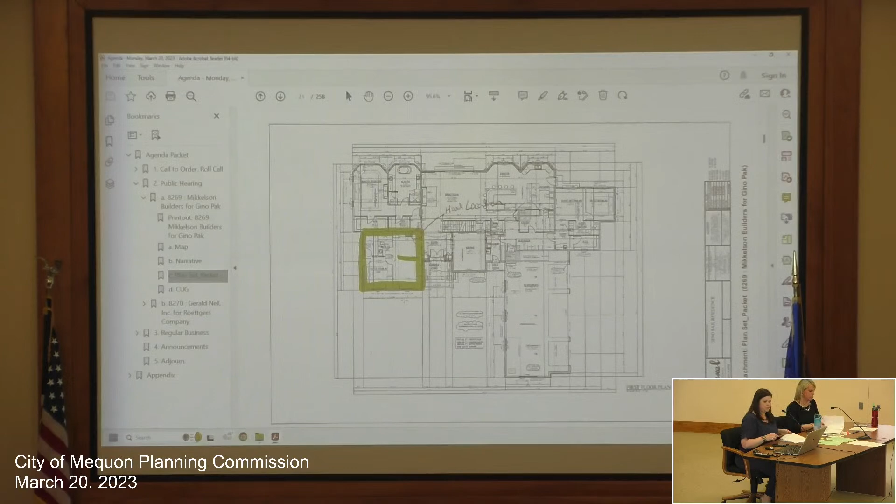Thank you, take it back to the commission. Any questions, comments? Alderman Strelchuk: this looked really pretty straightforward and well planned out. I'm going to make a motion for approval.

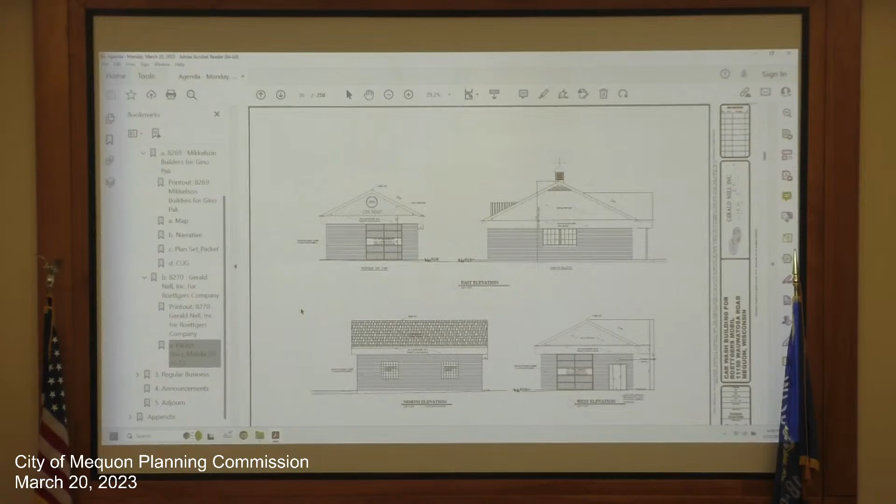For the site plan, let me grab that for you - and I apologize, that is a little small, let me see if I can blow that up. There we go. As you can see, the car wash is proposed to be on the south side of the convenience store. It's approximately 20 feet from the property line and does meet all setback and offset requirements.

The queuing of the car wash is along the west property line. This allows the queuing lane to be somewhat hidden from Mequon Road and Wauwatosa Road, and since many car washes have issues with excessive queuing, hopefully this back property line will allow for more queuing.

Staff has concerns about this queue lane and drive lane behind the store. As you can see, the outline here is where they intend to stripe the queue lane, but it gives the appearance that there's a second lane, and it's not wide enough to get a car through. So if you have a couple cars in this area, any car trying to travel behind here would get stuck until that queue line cleared up, and then they could come through.

Staff also requested a turning analysis, and it showed that to be able to get around this building, you have to enter into that queue lane. So staff is recommending that they redo their striping to indicate that yes, there is only one lane and not a second lane.

On top of that, we'd like to request signage stating that this is for car wash patrons only, so nobody gets stuck in this area. Staff is also a little concerned about this area here behind the car wash.

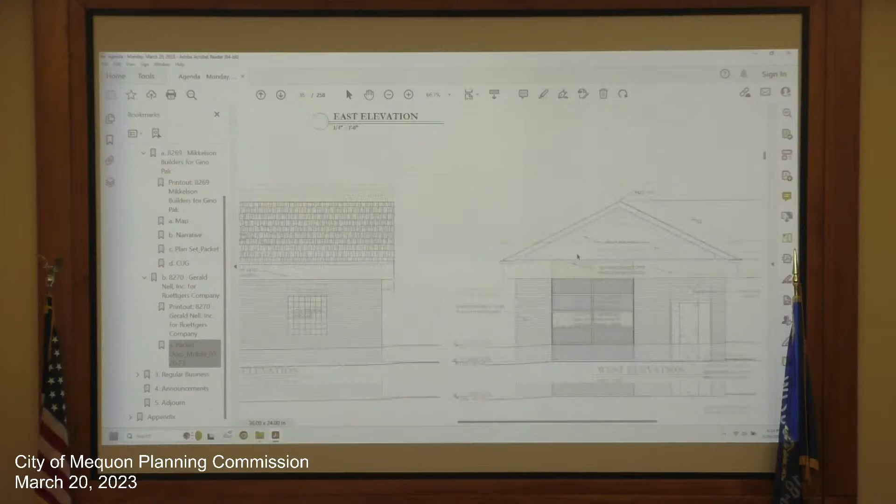On to landscaping - let me just grab that for you. This is the proposed landscaping plan. The plan shows that the majority of the landscaping will remain as is on the site, except a few trees, some arborvitae, and a few shrubs around the periphery dispersed throughout the site.

The plan does not meet code for street trees, parking lot shading, the 30% open space requirement, and parking lot landscaping. While it's difficult to meet that 30% open space requirement given the existing structures and site plan, the applicant hasn't really made any effort to address the spirit and intent of that requirement, so staff is requesting them to improve their landscaping plan to meet it.

Staff also has concerns about the lack of planned investment in the landscaping and the reliance on neighboring properties to provide screening and shading. The majority of the plantings planned to be kept are overgrown, in poor condition, or dead, as seen in the attached exhibit in your staff report. The existing landscaping doesn't reflect the quality of landscaping installed in other properties surrounding the corridor.

For instance, we included the Wisconsin Vet Clinic's landscaping plan, which is directly to the west, just so you can see the difference in investment and attractiveness of their landscaping compared to what's going on at Mobile.

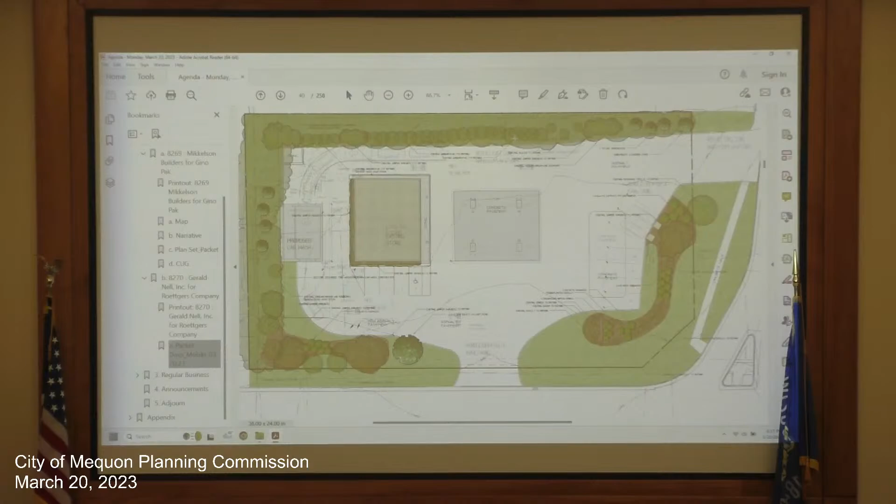In summary, staff provided a table outlining all the deficiencies in the code, areas of concern, and unknown details. Staff does recommend tabling the decision to allow the applicant additional time to meet these requirements, which would make them eligible for approval and address the issues identified in the table.

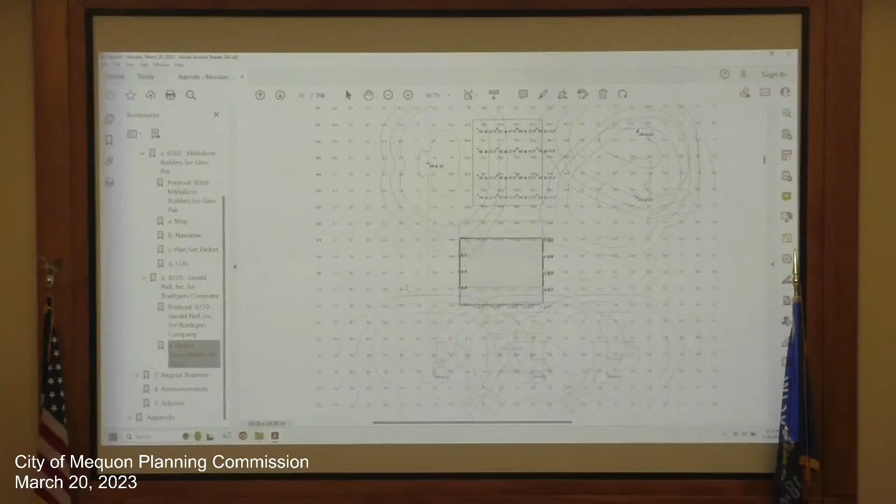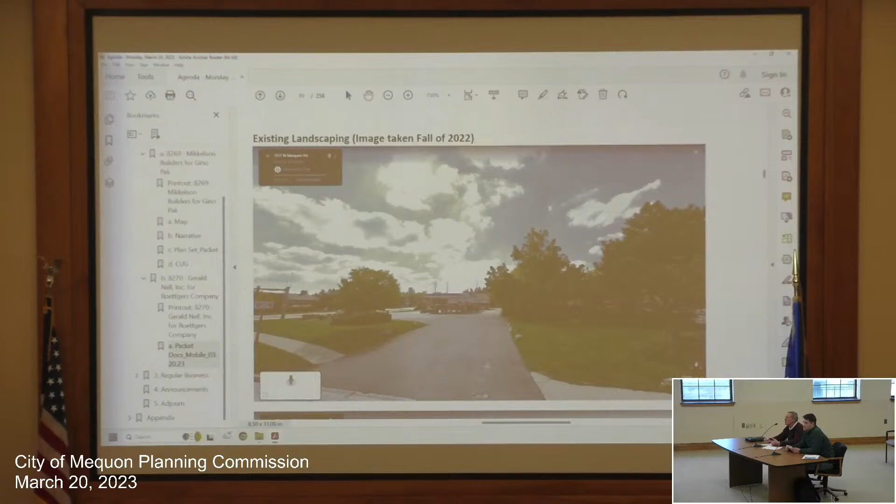I guess if we could zoom in, I just want to understand for myself. I mean, those are all landscape trimmed bushes. If you scroll down again, you can see that. Right now it's the middle of winter, and I understand that, and we've had a different type of snowfall this year, so I understand we have to clean up things from a landscaping perspective. However, I'm not sure exactly what's required beyond maintaining the property, adding and cleaning up. I get that, but to say that it's not been taken care of, I just don't understand that.

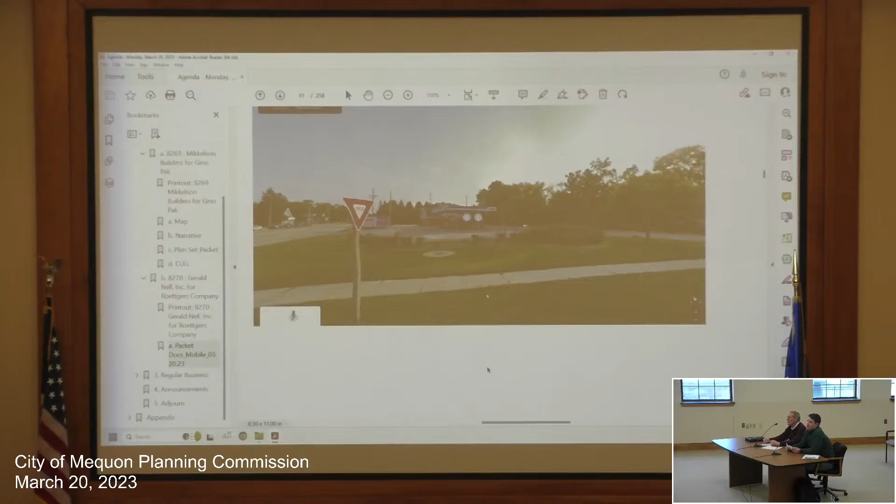Sure. Okay, all right, perfect.

Well said. It's one of the gateways to our city, so appreciate staff making sure that it lives up to that standard. Why don't we bring it up to Planning Commission for any feedback and questions?

Commissioner Chorin: As I listened to your report, in the past when you bring up some things, we can get the applicant to react to it, and they're fairly minor, things that can be documented. But as you proceeded, you started to get to a point where I think it would be hard to record them without some sort of drawing or something. So that's problematic to me. I think I agree with the position of the staff.

Alderman Strelchak: So I've got a couple questions. You were counting a couple of the parking spots as pump locations? That's correct. Our code for gas stations, the gas canopy, any gas pump parking spaces actually count towards that total.

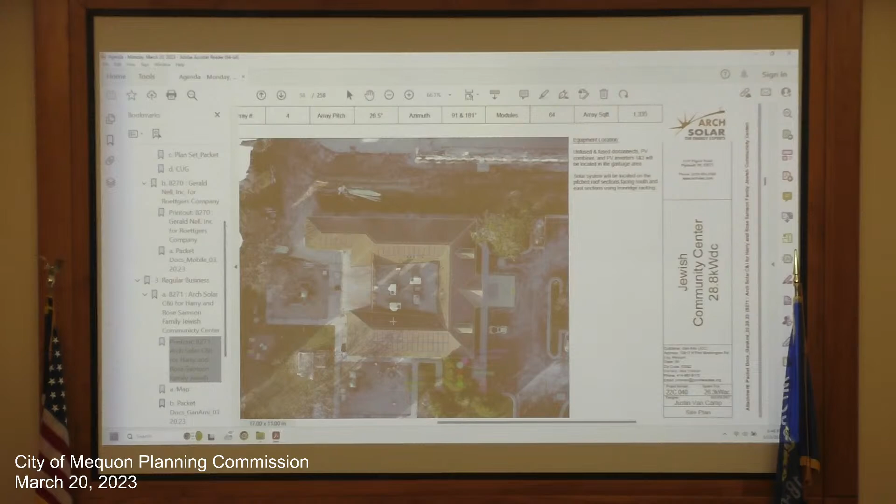The plan proposes the installation of 64 solar panels covering approximately 1,300 square feet. Let me get this on the screen so you can see exactly what we're talking about. As you can see, we've got solar panels facing the east elevation and then down towards the south elevation. 16 panels will be on the east, and the remainder on the south. The south solar panels will not be visible from Port Washington Road, primarily due to the significant tree coverage on the Cedarhurst Senior Living Community property just to the south. The solar panels on the east-facing roof line will be visible from Port Washington Road, though.

Staff did identify a couple compliance issues with this site that we were hoping to have addressed. Let me grab that map for you. Staff identified a portion of the parking lot has been placed approximately 20 feet over the property line and does not meet the 20-foot setback requirement. Staff can't identify when this was put in, and it was definitely not approved through Plan Commission. Therefore, staff recommends as a condition of approval that this portion of the parking lot be removed, landscaping be restored, and curbing be installed to make a continuous curb line along the drive lane by June 1st of 2024. So we are requesting this in about a year and a half, hopefully giving them ample time to correct the situation.

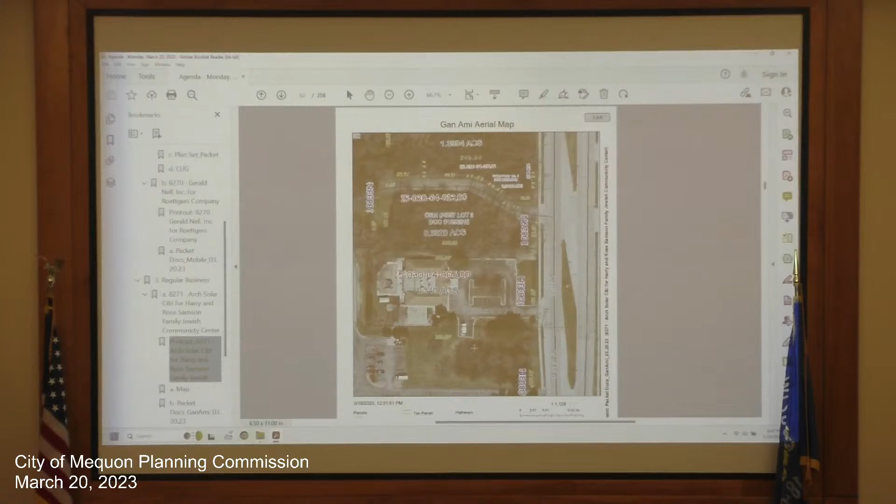In addition, staff has noted that the site does not meet Section 58-5064 of the landscaping requirements, including street trees, parking lot shading, and landscaping between the public road and parking lot. In staff's opinion, at a minimum, street trees and landscaping to screen the parking lot from public view should be installed by November 1st of 2023. This is also to help reflect the fact that the city is going through a streetscape program right now for Port Washington Road, and this will also enhance that corridor's appearance. In conclusion, staff recommends approval of the building plan based on the conditions provided. Thank you.

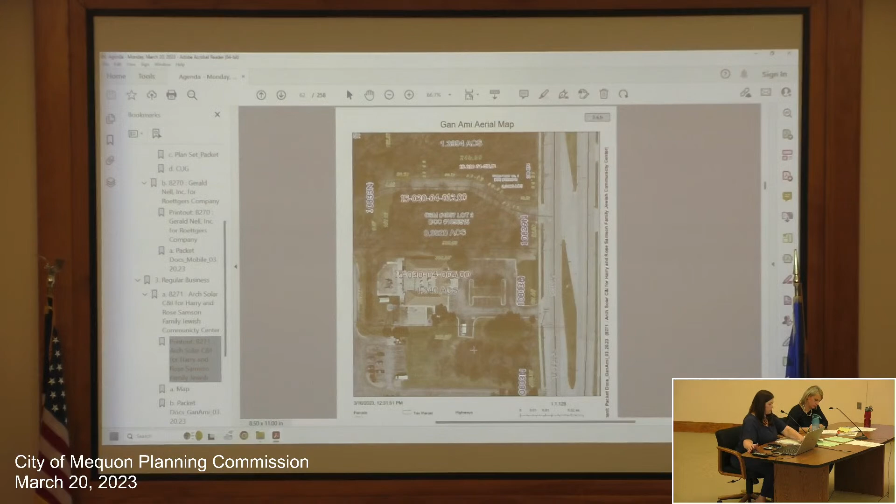Thank you. Is the applicant here? Do you have anything you would like to add? No, name and address pretty much sums it up. Okay, thanks for letting us apply for these. I think it'll be a cool project.

Yeah, we thought so. On the 20-foot parking item, I think staff was very reasonable, giving you until 2024 to figure out a solution for that. So, I work for the solar installer.

So I guess for them to install the panels, would the solar installer be responsible for that work? No, but the applicant should be aware of it. Oh, okay. We're about to vote on this. Do you think they're okay? Okay.

Any questions from the commission? Commissioner Chorin? Move to approve based on the comments from the city staff. Second. We have a motion and a second. Any further discussion?

All in favor, please say aye. Aye. Aye. Any opposed? None. Thank you, have a good evening. Thanks.

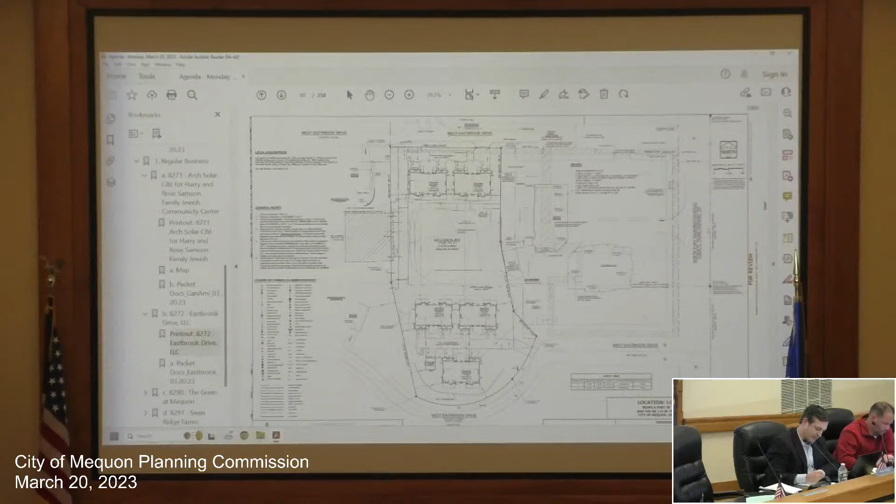Thank you, Chairman. This was in front of us last November for a PUD amendment. This is phase 3 of Lexington Square. The plan on the screen is the site plan that pretty much mirrors the concept plan. There's 2 buildings located on the north end and then 3 on the south end, with a driveway coming in through here and a driveway through here. Again, they meet all the requirements of the R6, the PUD, and the PUD amendment.

Throughout this process, there's been, I think, maybe too much conversation about building design. I did have some comments originally at the last planning commission. I met with the architect, Marty Chorn, and the applicant, and the common council weighed in on the architecture as well. So we ended up having a number of different iterations to the plan. I'll go through where we ended up, and we're looking for feedback from the commission.

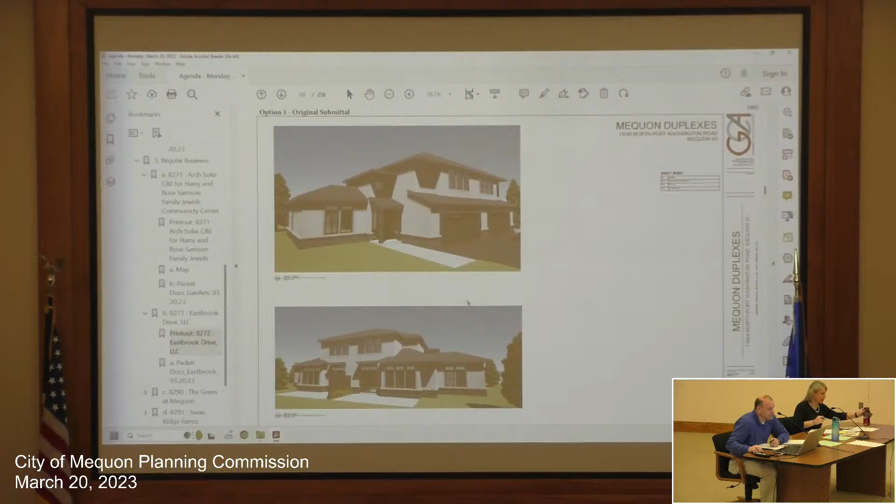So this was the original concept plan. It showed basically the front having like a shed roof, a stucco-type material with some more earth tone colors. I think at the time staff was a little concerned about the materials as well as the shed roof design. The applicant did come back with another design that had a little bit different roof line, a different material, a different entranceway. And then there was a discussion at one point about having the garages separated. We were concerned about having the garages next to one another.

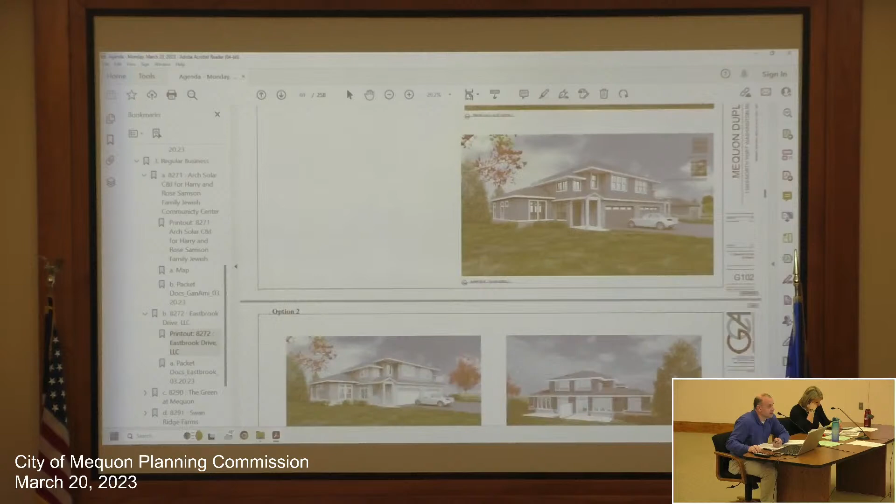So then they came up with a third design, which is basically the current design. Let me zoom in a little bit, which is the top version. What we tried to do here is emulate some of the developments in the neighborhood. But the hard part is this building width isn't quite as wide as some of the other ones, like Aster Woods and Eastbrook Court, which are roughly 90 to 100 feet in width. This one is only about 70. So it was difficult to totally emulate what we were looking at in the neighborhood.

So staff was concerned and maybe felt option 2 might have been a better option than this current one. I took some pictures of what's out there now. This is Eastbrook—as you can see, they have the roofs, the garages separated, a big gable roof on each end, but a lot more substance in the middle in terms of the building and the roof line.

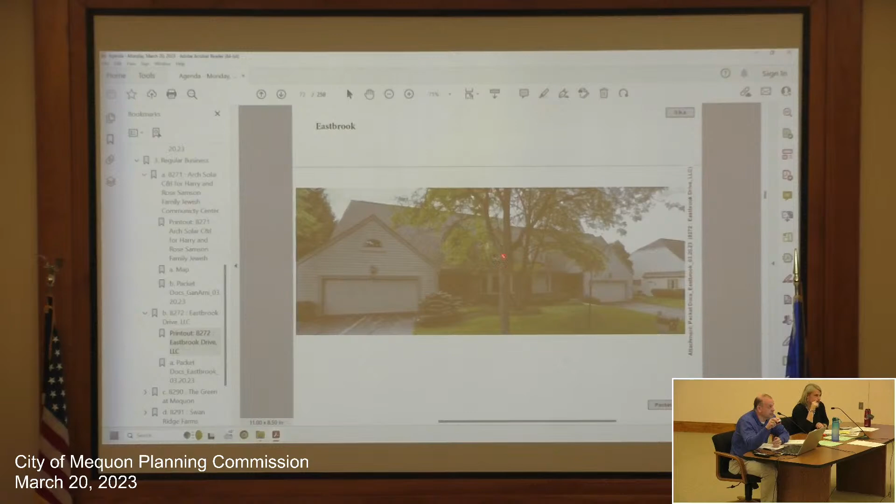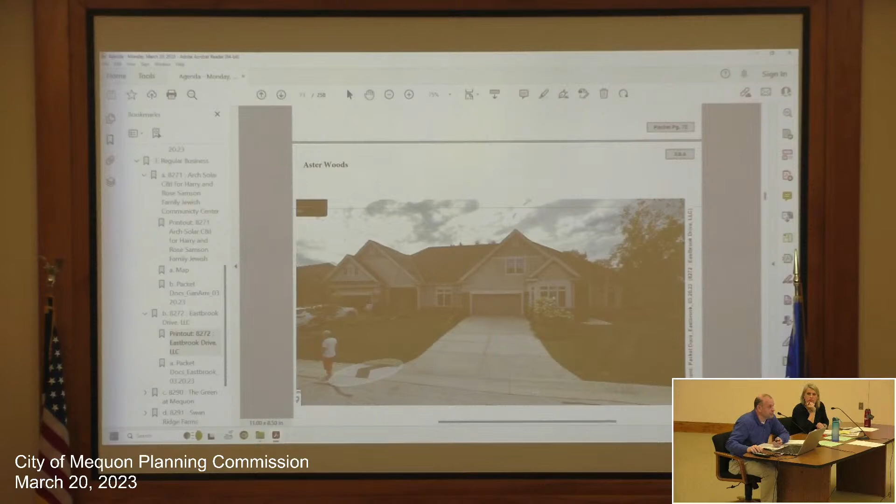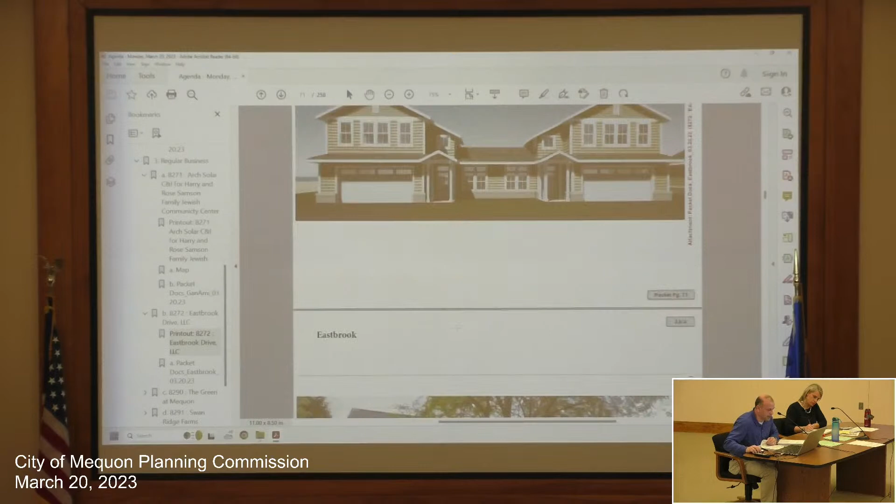And then this is Aster Woods, kind of a similar design, but again, this is a lot larger building footprint than what's being proposed here. So we're looking for some feedback and direction from the commission on what design to go with. Eventually this actually gets approved by the Architectural Review Board—the Planning Commission's role is to pick a concept design, and the Architectural Review Board will decide on final design, materials, locations, and things like that. I think there was something asked about a neighbor who sent an email regarding landscaping.

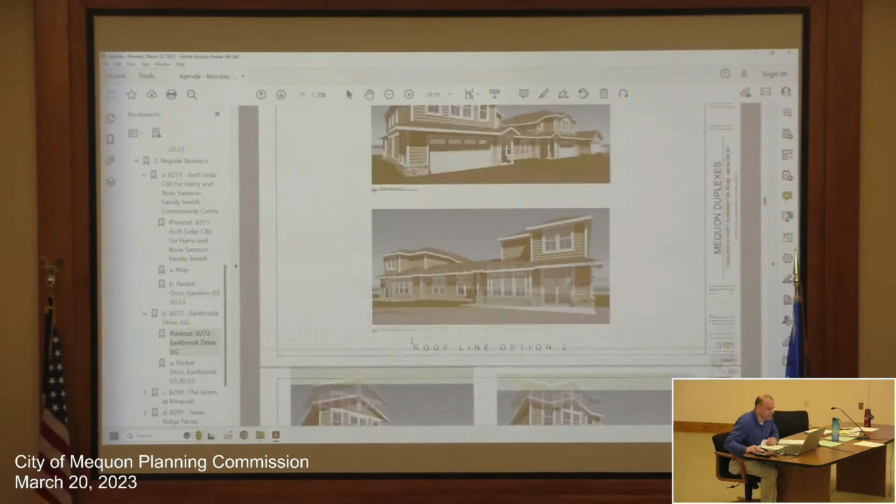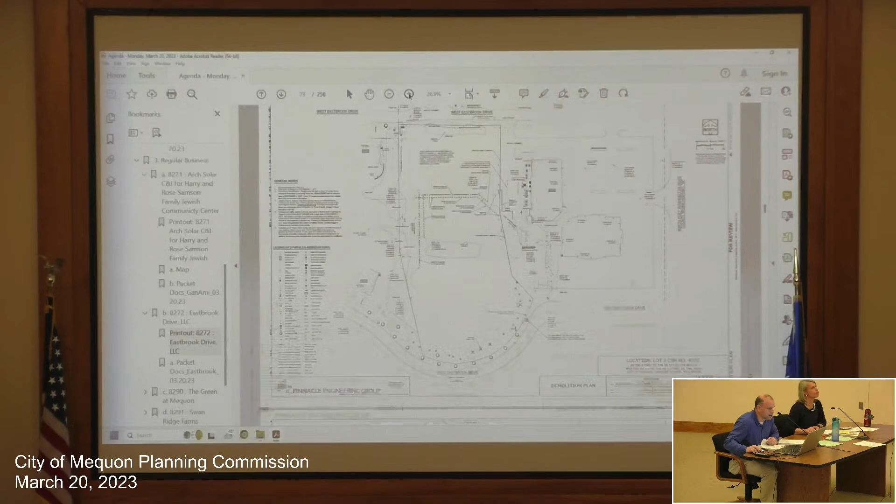Basically, the concern was over the landscaping along Eastbrook Drive. It didn't state either side, but I believe it's probably both where the concern comes in. On the north side of Eastbrook Drive, you see this area here where it says remove trees. This is an area that has a number of different existing pine trees and some deciduous trees in there.

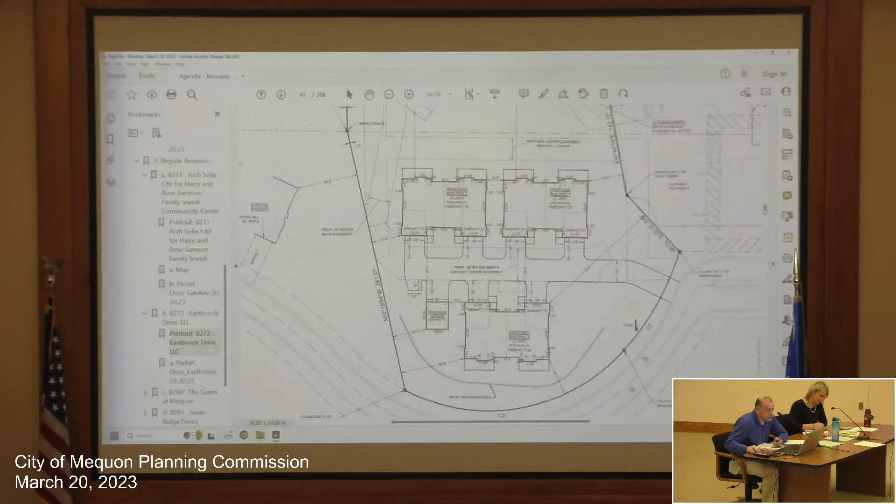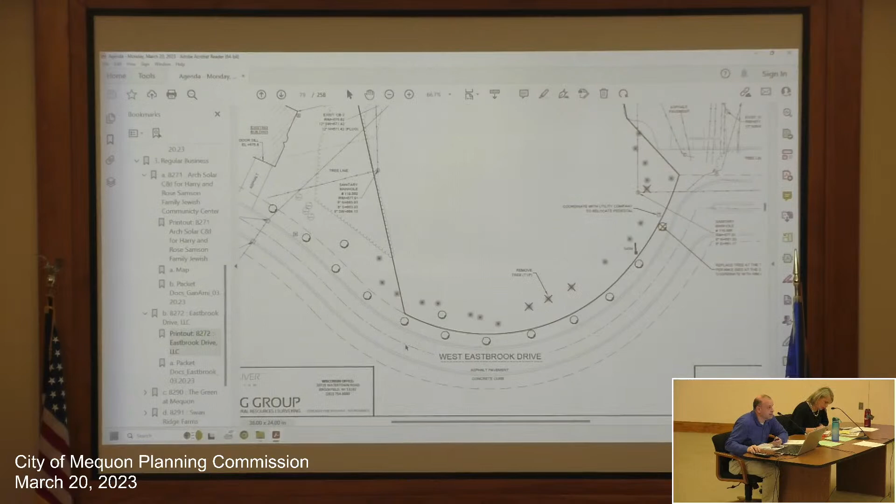So here they're showing not too many - there's a couple of trees being removed, you see three here, one here. These are some evergreen trees being removed for the development. They're replacing some of the on-site landscaping back in the yards of these buildings, but they're not replacing these trees. There are also a couple, at least from what I could tell when the snow was here, dead street trees that were actually removed and not replaced. So if those are still in that condition, we would like to see two new trees there as well.

Other than that, overall, we're supportive of the plan and recommend approval according to the conditions in the report.

Thank you, Mr. Zader. I don't believe anyone had anything to say about this matter, no one's registered to speak. I did have several of the homeowners reach out to me over the course of this process and ask questions, and they all seem very supportive of the project. They understand it's going to be built on. Seems like the screening along the main road there is the main concern.

Jackie, you said the main reason why it has to come down is because there's a sanitary sewer line underneath it - but why does that mean the trees have to come down? Well, in order to put the sewer in, they're going to have to dig it up, which will impact it. But there's also a driveway.

I have the proposed plan up in front of you, and I can show you both. The driveway itself is also an issue, as you can see - it's coming through here, and then I believe that hatched area is the sanitary sewer easement. So there's a sanitary sewer easement here in the hatched area, and then the driveway here. Those two things combined make it difficult to keep those existing trees. Now, as you can see, there's white area outside that sanitary sewer easement - this is part of the public right of way. This is where I'm proposing that we add street trees every 30 feet on center, which would match what happens down as we go west towards Eastbrook.

Got it. This time we're going to take it to the applicant for a brief presentation, and then we'll discuss it up here.

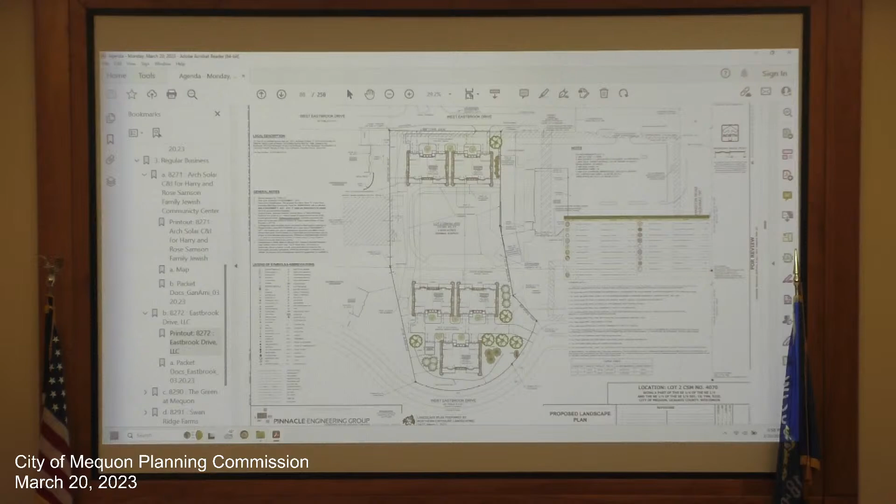So again, we're just looking for feedback, and then once we have a concept plan decided upon, that recommendation will go to the architectural review board, and they can work on the details of the locations of the materials, the brick, the stone, and things like that. Thank you. Any other comments or issues with the recommendations by staff in the packet? No.

Good evening, Tony Zanin from Pinnacle Engineering, civil engineer on the project. There's two comments about access points. One on the north, we understand, keep it as far easterly. That's been kind of the theme going back to the approved plan in 2019.

The one on the southern end, we did some changes back in '19. We originally had it due east-west, so when you came in, the engineering staff at that time felt like if you came in and you were heading due west, you would drive right into the site, and they didn't like that idea. So we put that curve in it, and we're kind of south of the median.

So if you leave our site, you would kind of direct yourself to the south side of the median to drive easterly. I think when we were here a few months ago, there was some conversation about shifting it 50 feet further east from what you see on the screen. Today's condition is 30 feet further south. So you'll see, if I don't have a pointer as Jack did, but yeah, you see that curve there. We would twist it even further southerly, 30 feet.

There's also a sign on our property that's actually not our sign, it's the neighbor's sign. So if we shift the road, we're going to really get into that sign, and our vision triangle on that driveway is going to be more impeded. So that's going to make that sign a bigger issue.

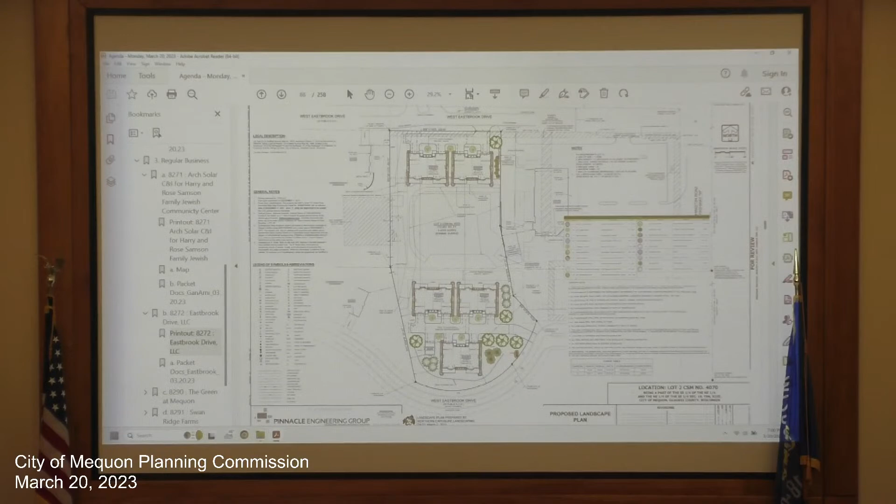We can talk about it. I don't know if this is a place to talk more about it, or if we could just, if you're going to do the approval. Well, item 13 of the conditions of approval says the south access point shall be moved south of the existing Eastbrook Drive median, approximately 30 feet south of where it is currently shown on the submitted plan. So that sounds somewhat definitive.

Cole: I was gonna say, can you guys hear me? I was gonna say I'd be fine with striking that condition and just working with the applicants. We don't want it getting into that sign either, especially with vision coming out. So I'd be fine with just removing that condition of approval if you guys are okay with that.

How would you want it stated? You can just remove it completely, or you can say move it. Want them to work with you or not work with you? Because if you remove it, they don't have to work with you on it. Right, we could just do—applicant must move.

Let's work with staff on the final driveway location on the south end, to be determined with staff. Any other matters we should discuss?

Turn it over to the Planning Commission, Commissioner Chorin, and thank you for meeting with staff and the applicant for this process. The plan illustrates having the driveways separated, the garages separated. We spent time looking back and forth at the different options relative to where the driveways are, where the garage doors were, where the entrance was. What struck me looking at the pictures of the existing Eastbrook Estates homes is that clearly the garages are separated, so if you want to be somewhat sympathetic to that, I think that's the right approach.

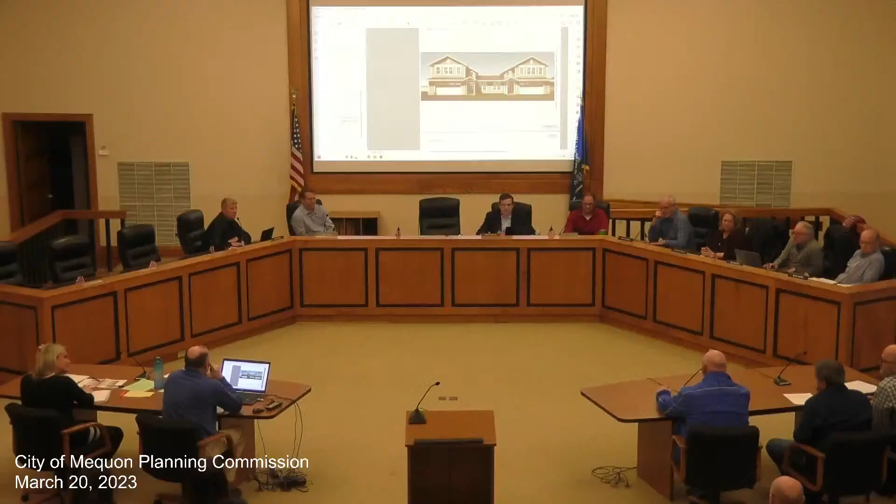There was, I don't know if I have this, I'd have to go to the actual packet. There were some side elevations that you can kind of see here. This section had a bump out with stone, and when Marty and I met with them, we had them remove that. We didn't feel that was necessary. It was kind of heavy, sticking out.

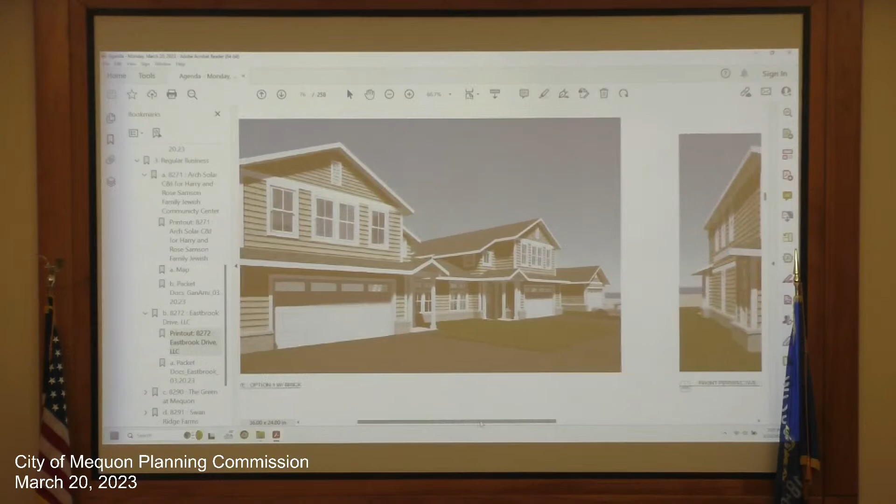No, it worked good. It's just they suggested that we remove some of the stone. That's kind of... we need some more dialogue here.

Commissioner Holly. I actually prefer option 2, honestly, not to be like the lone wolf, but I do kind of agree with John. I mean, it's your building.

Do you prefer option 3? We prefer option 3 for the interior layout. So you do, okay, getting an extra den out of there, so there's a little more space. Yeah. Okay, I do agree with John's comments though.

Honestly, visually and aesthetically, I still like 1 and 2 better than 3, but where do you guys stand? Sure, so we get an extra room out of option 3.

Yeah, I mean, I would defer to you. You're the developer on this. If that's what you want to do, I'm perfectly fine with that. And I would say that the architectural board is probably going to give you some comments as to what they're going to want to see, but I'm fine with that.

I just want to clarify that only these 2 buildings will actually face the road. These will all be faced interior, so we're really kind of talking about the facade of those 2.

Okay, good feedback. Other commissioners.

I'll just thank you, Commissioner Lemke. I'm going to defer to the architect. I've got an opinion, but 6 opinions here is not going to clear anything up, so I will defer to what Marty wants to say on this.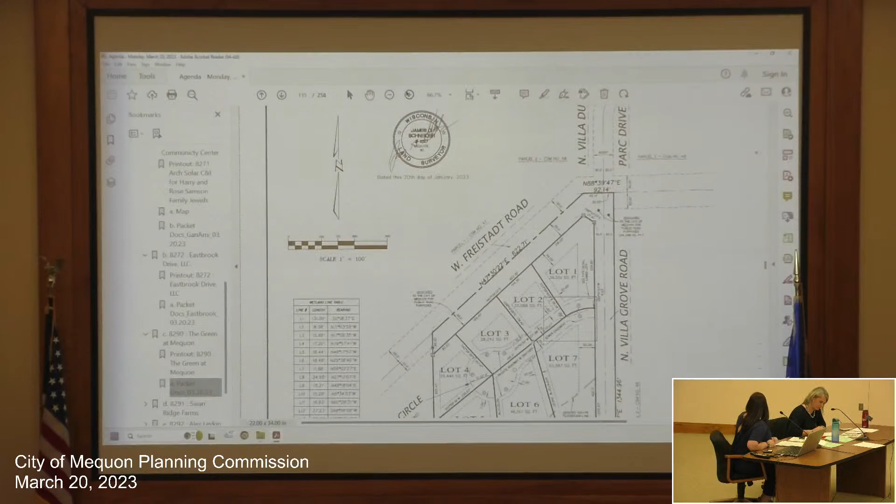Engineering, do you have anything you'd like to add? Nothing major to add other than just a few outstanding easements to be recorded as well as reviewed by the city attorney. Those include both public utility and private utility easements, and then just staff punch list items if there are any. Overall, staff recommends approval. Thank you.

We will turn it over to the applicant. Do you have anything to add?

I do. I would like to discuss the $4,100 fine at some point. I don't know if tonight's the right time to do that. We have a tree preservation ordinance that was broken, so you'd have to go through a different process. I don't believe it's this body's purview. But I understand it was an accident, not to get into it. You'll work on that.

Anything else to add? We don't have anyone registered to speak, so we'll bring it back up to the commission. But seeing no discussion, we'll entertain a motion.

Motion for approval. Second. All in favor, or any further discussion? All in favor, please say aye. Aye. Any opposed? None opposed. Approved. Congratulations.

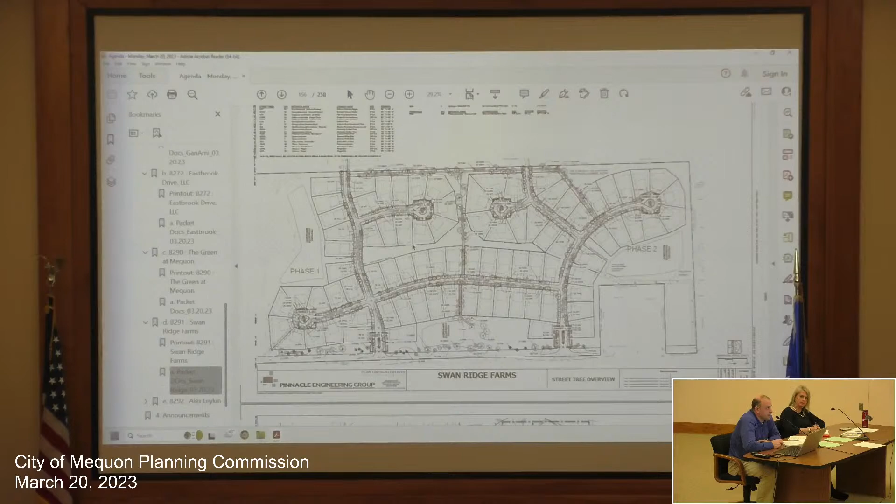So the couple things I had about the sewer—first off, one of the conditions of approval is the eventual sewer utility district commission approval for the relevant section of the development agreement. There's a pretty substantial chunk in that development agreement draft in the packet relating to the sewer extension. What we're proposing is that a letter of credit be posted by the developer for a length of time specified, until that connection is made to those 2 adjacent properties. Those 2 properties, as Jack mentioned, were added to the sewer service area back when this first came through for rezoning, I believe. So we're just working through the final language with SUDC as well as a legal review from the city attorney on that language.

And then, did you guys want to hear about stormwater? Usually no one does. The neighbors would like to hear that. Thank you.

So I'll go over our ordinance very briefly. What we require is that after stormwater ponds are constructed, the final development actually meets the same runoff rate or less than before, in certain storm events ranging from a small 2-year storm up to a 100-year storm, which is like 6 inches of rain over 24 hours. The added challenge on the developing end is that our ordinance restricts the runoff to be the same as what it was pre-settlement—like when this was a bunch of trees back in the 1600s, when no one was living here. So it's a pretty restrictive stormwater ordinance for runoff.

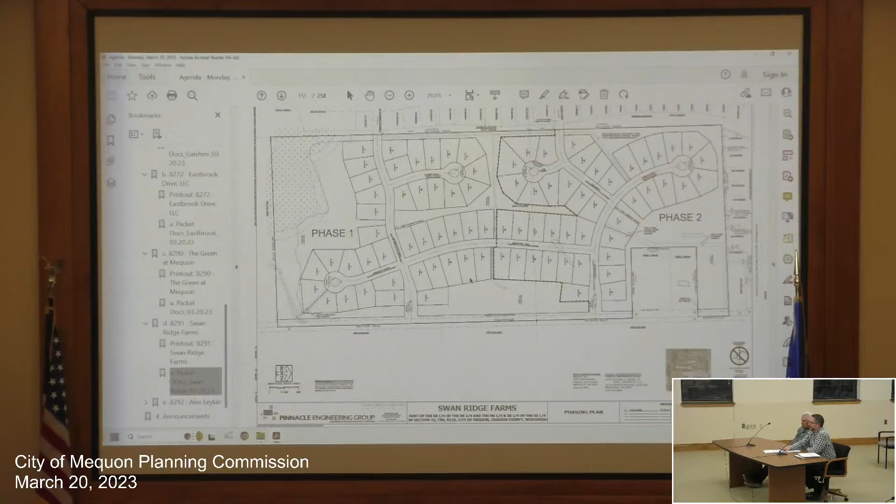Jack, one of the questions that came up was relating to the 100-year trees that were being removed as a result of the sewer location at the north, west. I guess I would defer that to the engineering and developer. This is the location I think she's referring to.

There's a tree line back here, but the sewer and water easement is also located there. The water will come down and then come out and get to Swan over here. So I don't know exactly where those trees are in relation to that sewer and water line. If they're in the same spot, obviously, they can't be saved. If it's on the property line, then it causes issues because you want the sewer and water easement on that property line so the neighbors can connect to it.

So it all depends on where those trees are located. I'm assuming the developer wouldn't have a problem saving the trees if it doesn't impact the location of the sewer and water. It's just an additional cost to take them down if they're not necessary. But I don't really know the exact location of those trees in relation to the sewer and water line running through there.

The property owner said they were approximately 18 feet past her property line to the west, which is, I think, that easement shown on there is about 20 feet wide. So it's pretty much the entirety of that easement. Like Jack said, with the connection, they're going to have to bring a connection for the sewer right to where those property lines meet, kind of in the middle there on the screen.

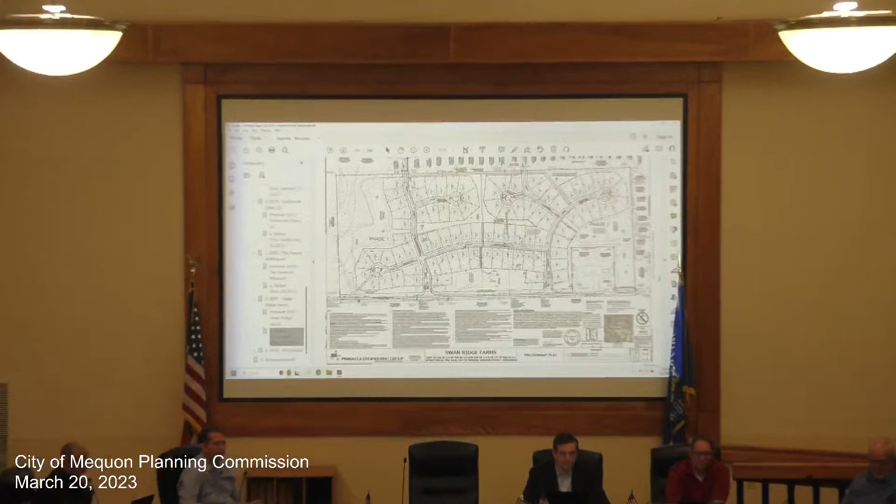They're bringing in public water. This is a public water connection. Okay, so the public water would be connecting with the Huntington Park water? No, no, it's stopping at our west property line, just dead end with a blow off. So it's not a management of water pressure? No, I think Huntington Park, if I recall, is a private water system. So if they ever wanted to hook up to ours, they could potentially do so, but city water would have to verify they meet all our requirements, and they'd have to appeal or apply to connect. But at this point, they're just ending at the intersections.

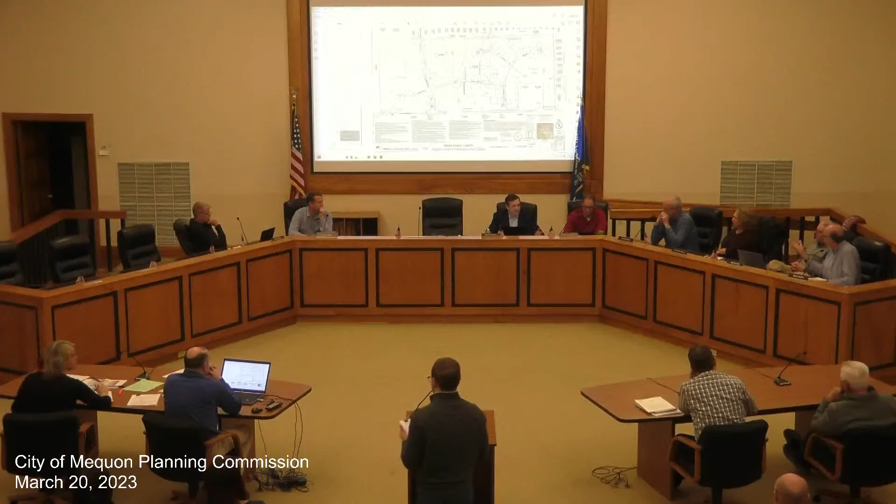Using an L intersection today, becoming a T. I think that concern did come up during rezoning, and I can't remember if we required an additional stop sign at that intersection. If not, we'll look at that, and if there's nothing there, we could do some traffic counts or something like that. I'm not suggesting we put endless stop signs out at intersections, as much as simply that people are accustomed to visibility, and there's a pronounced pattern today which is going to be added to with another way, such that perhaps the southbound approach would be the stop. I'm just asking that be addressed. Thank you, and we do have some flexibility on traffic signs even after it's approved.

Thank you, Commissioner Barnes. Other feedback, Commissioner Lemke? Just have a quick question.

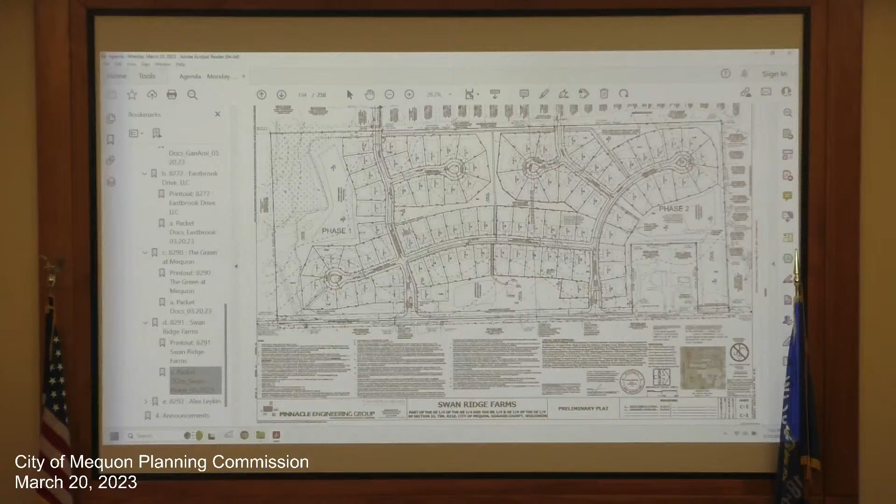What if one of those two homes has a septic issue in the next couple of years? What is their recourse? Do they have to fix their septic as they wait for this to get brought in? We're still working out the timeline for the sewer connection and the length of the letter of credit. It looks like we're restricted by state statute on what we can require for a length of time. In regards to the septic tank or holding tank, I don't really have a great answer right now. I think that's something we could look into with the development agreement going to the Sewer Utility Commission, if there's anything we can add or amend to the amendment they signed to get into the sewer service area.

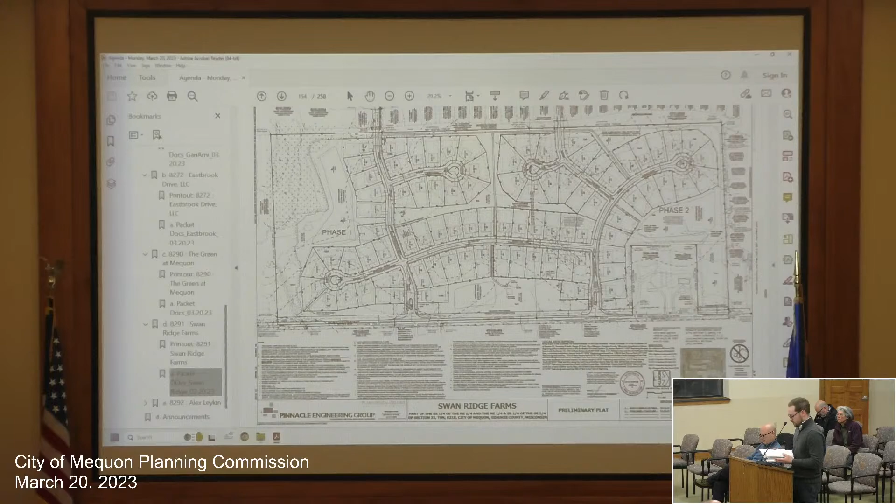Okay, other feedback from the commission? We do have another individual who registered to speak. He's in support of this item, Mr. Ken Jonas.

Thank you. Please state your address. My address is 9627 West Huntington Drive.

That will actually connect to Huntington Drive, will connect up, I believe, with this phase. But the reason I wanted to talk a little bit is that I'm on the Huntington Park Water Trust.

Just to give you a little background, the Water Trust was approached about whether we wanted to connect up with this water or not. We had quite a bit of discussion with staff last fall, but it stopped because there were questions about exactly what was going to be done with this subdivision. In fact, the last I knew, it was all going to be one big subdivision. Now I understand it's really two phases, which is fine.

There's no decision yet about whether we want to connect, because we don't have all the information. But one thing discussed, and even suggested by staff, is a discussion with the developers at the right time about setting it up so that, not that we'd use the water coming into this new subdivision, but that there would be a connection, a valve, so if and when in the future, we could actually hook up quite easily without a lot of expense.

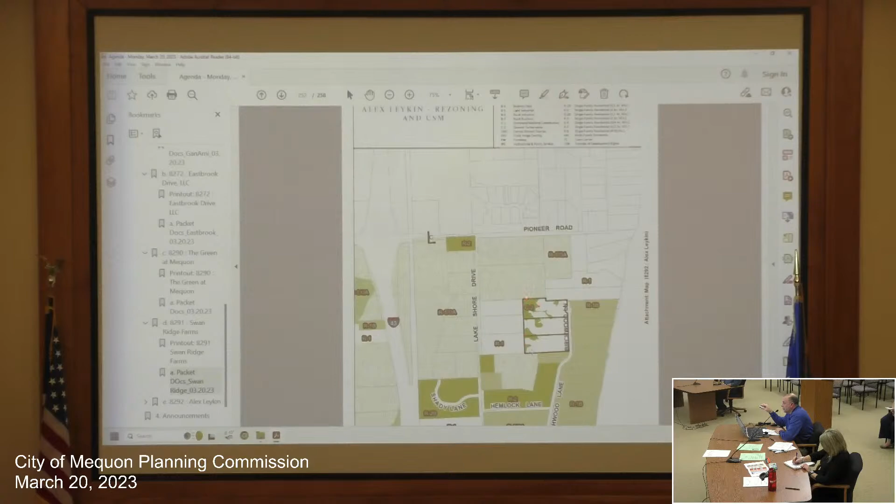Now his current request is to rezone it to R1 OA, which would require it be made into one large lot. The rationale is he wants to eventually build an agricultural building out there, and you cannot do that unless you have the OA, and you can't have the OA unless you have at least 10 acres of land. So this request would be contingent upon the CSM being approved to combine it into one lot prior to Common Council action on the rezoning from R1 to R1 OA.

Staff does recommend approval of this change, and as a further caveat, any agricultural building in excess of 1,000 square feet would have to come back in front of the Planning Commission at a future date. I believe there's one condition he wanted to question that was an engineering question. I'll let him bring that up, and I'm sure Cole can address the issue.

Thank you. And no one was registered to speak, so why don't we turn it over to Mr. Leykin if you have anything to add.

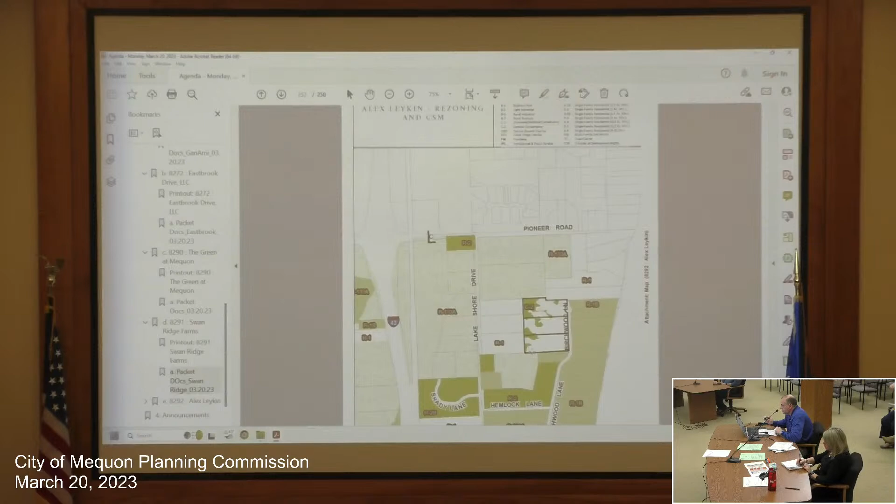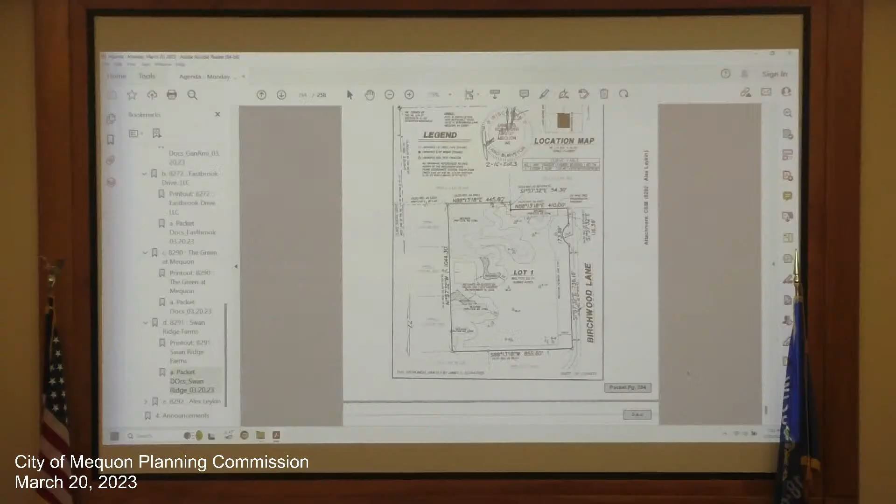Oh, that's better. Yep, you got the button down. Anyway, I got the button now. I haven't read the condition the way Cole amended it. Sorry, Cole, what do you call it? There's a condition on there for wetland delineation of some sort. I don't know how it reads currently, the way you've amended it, so I never read it.

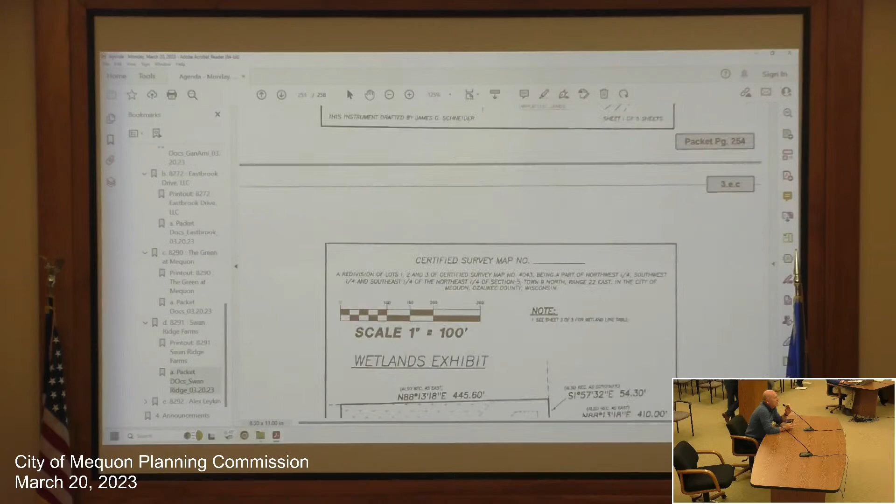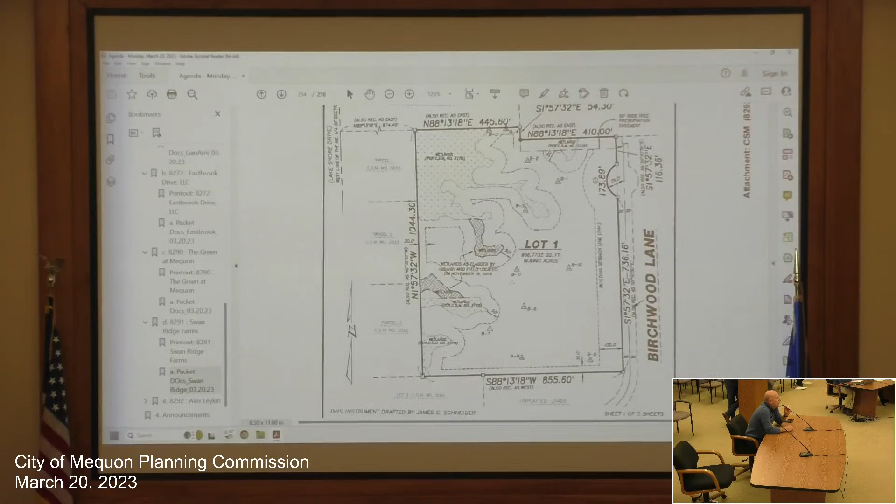Well, it's got to be a current wetland delineation. Before it was being divided for development purposes, so obviously we have that condition. The condition itself is quite frankly meaningless to me, but as a point of property rights, there's no state statute or city ordinance or city policy that would require such a condition on an empty, vacant lot. The condition is already in place for when I do build. So for purposes of just my mental satisfaction, I'd like it waived, nothing more than that.

Sure, thank you. And again, there is an older wetland delineation, it's just not updated. And then now we're recombining it, and you want it updated before we recombine? Correct. So that was condition number 3.

In talking with the applicant, actually what we did last time with the past land division was just add a deed restriction before any structure can be put on that, because what we're trying to verify is that there's no structure being put in the wetland setback, and we obviously need to know where the wetlands are for that. So I have a maybe proposed change to number 3 if you guys are willing to entertain that. Please. So I would just ask that the property shall be deed-restricted from development until a current wetland delineation is performed and approved by the City of Mequon and DNR.

Let's go over to the commission and see if you have any thoughts on this. Alderman Strzelczyk: one bigger lot, that's great. You're moving in the right direction for the rest of the city. The law of averages are moving in our favor.

Just wanted to know, for an ag overlay and exterior structure, do they have to be performing agricultural activities and have that proven in order to justify any structure? They have to be used for agricultural purposes, but there's very little verification on our end. This has come up in the past. I think one or two of you were on the board years ago when there was a debate over an agricultural building on a parcel with no farmland, just a wetland, and the owner wanted to use it to store machinery for a wetland scrape he did once a year. There was no way for us to verify or prove that case, and we don't go back annually, but we do add a condition of approval that the building can only be used for agricultural purposes on that site.

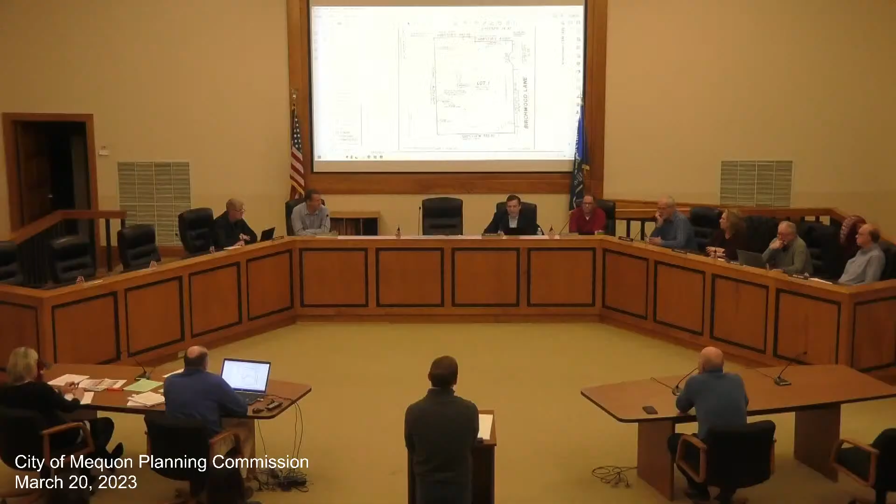Cole, is there something that prevents us from waiving the updated wetland delineation requirement, or is that a requirement? Is it a Mequon thing or a DNR thing? There's language in our code that requires wetlands to be shown on any land division. What we're trying to verify is just making sure that impervious surface, buildings, and driveways aren't put in that setback. Most of the time, land division is accompanied by some sort of development, so that's why it's in that section.

We've done this before numerous times. On a smaller lot land division, we want to know where the wetlands are to make sure we have buildable lots. On bigger ones, we're not as concerned with that, but we do want to make sure they have the ability in the future to build something. We've done this on a couple other CSMs within the last couple years where they didn't want to go through the expense of a wetland report. One was a one-lot CSM for someone who just wanted to hunt on it, so he didn't want to go through that process. We put a deed restriction on it and said if you ever come back and want to build, you're going to have the wetland delineation. It's marked on the actual CSM, so there's no confusion to a future buyer.

Mr. Leykin, which would you prefer, updated wetland delineation or a deed restriction? We have to be consistent. A deed restriction - it's a temporary restriction clearly, but my point is I understand it needs to be done. The wetland delineation needs to be done before building anyway, so it's kind of redundant. But that's neither here nor there. And I drive my tractor there all the time, so I'm kind of a Forrest Gump over there for agricultural use. Thank you.